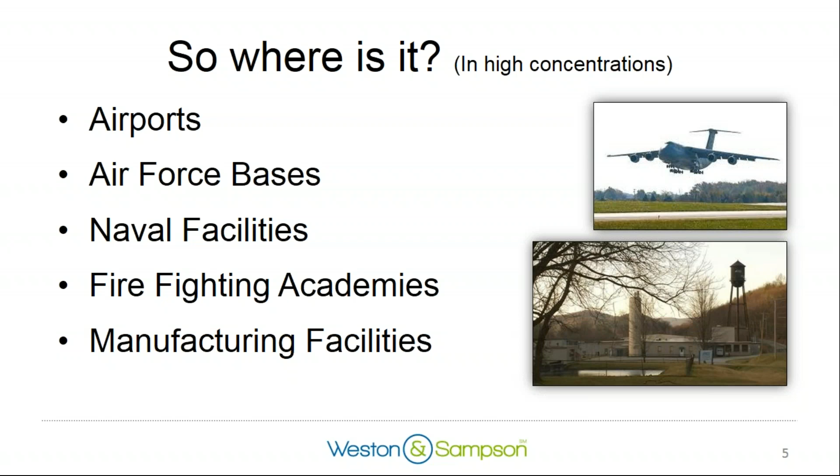But more recently, kind of since 2018, we started to see more and more locations with positive PFAS in the soil or in the water. And so recently, as analytical sampling methods have improved and we see detection levels going down and being more accurate, we see PFAS in a host of places, like car washes, agricultural land where biosolids are spread, and biosolids coming from wastewater plants, so there's often PFAS in wastewater.

Private septic systems can have PFAS. Anything that's excreted from a human body or washed off your Teflon pans and goes down the drain often ends up in a septic field. Landfills, and that's either from accepting sludge from wastewater plants or accepting those modern products that I was discussing. Waterproof fabric, old carpeting or furniture often has PFAS, which can seep out of the products and get into the landfill leachate. And then more and more, we're starting to look at PFAS in food.

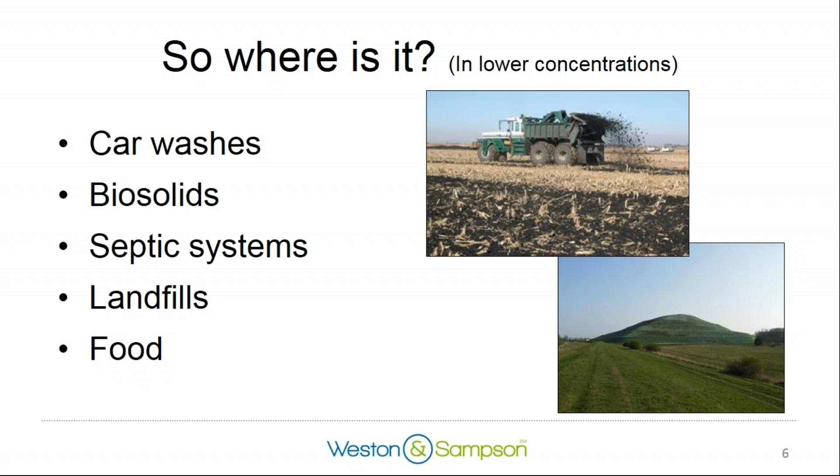So not necessarily just in plastic packaging of food, but also just in fruits and vegetables that you might grow in your own backyard garden. Anywhere that you are working sort of in the modern world, there's a good chance that there's PFAS in it. And whether that's plant uptake from vegetables or animal uptake from feed, we kind of are starting to see PFAS in a whole host of places.

So on the manufacturing side, you can have discharge to surface water sources or to wastewater plants. Once the wastewater plant gets it, it can either be discharged into your surface water supply, or it can be transported as sludge to a landfill or biosolids to agricultural land. Leachate from landfills can go back to the wastewater plant, and you kind of have a cycle right there where wastewater plants are sending activated sludge to the landfills that has PFAS in it, and then it gets into the leachate and comes back to the wastewater plant.

We see release again from firefighting foams, which can run off into surface water, or it can seep into the groundwater supply. And then we also see a lot of spreading of PFAS just through spreading of water. And so whether that's through drinking water to residential use, or irrigation water, possibly pulled from a local river or aquifer to irrigate farmland, that can also spread PFAS in that manner.

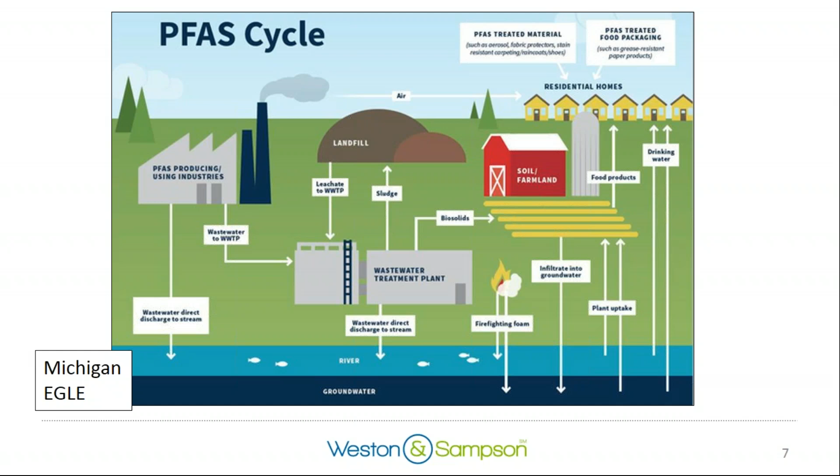And you do see in some states that there's high amounts of positive samples, such as Michigan, for example. And there's a good chance that Michigan does not have higher than average PFAS in their environment. There's a good chance that they are just being more proactive and sampling more locations, which results in more positive detections.

So before we go on to the treatment side, I just wanted to reiterate the structure of PFAS. And so that carbon-fluorine bond, which forms the backbone, has an adsorptive property to it. So it can bond well to organics. And so that adsorptive property is based on the chain length. So the more carbon-fluorine bonds in that backbone, the more adsorptive the PFAS compound will be. Conversely, the head group, which is the functional group on the end of the compound, is anionic, so it has a negative charge. So that negative charge can be useful when we talk about different filtration media such as ion exchange, as it gives us something to bind onto.

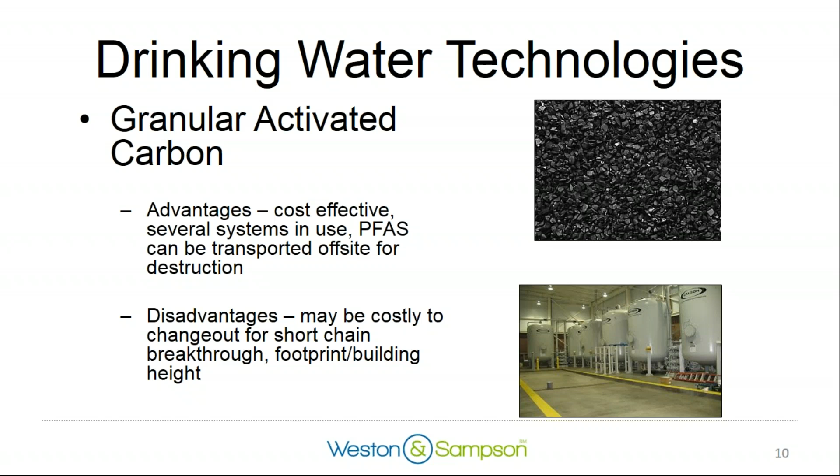When we look at a newer developing technology that's starting to really get a lot of focus in the market, it's ion exchange resins. So ion exchange resins are essentially plastic beads that have a coating or a surface that promotes not only adsorption of PFAS compounds, but also ion exchange properties. So you will adsorb the backbone structure of the PFAS compound, but you will also release chloride into your water in exchange for taking up the head group of the negatively charged PFAS.

So because we have this dual method of treatment, adsorption and ion exchange associated with resin, we're seeing more efficient run times and lower contact times required to see equivalent PFAS removal. So with this kind of custom designed treatment associated with ion exchange resins, we can see this longer life. The lower contact time results in smaller vessels, which can result in smaller building footprint, smaller land footprint, and oftentimes they're shorter vessels as well, which means you don't need to go quite as high if you're putting these vessels inside of a building.

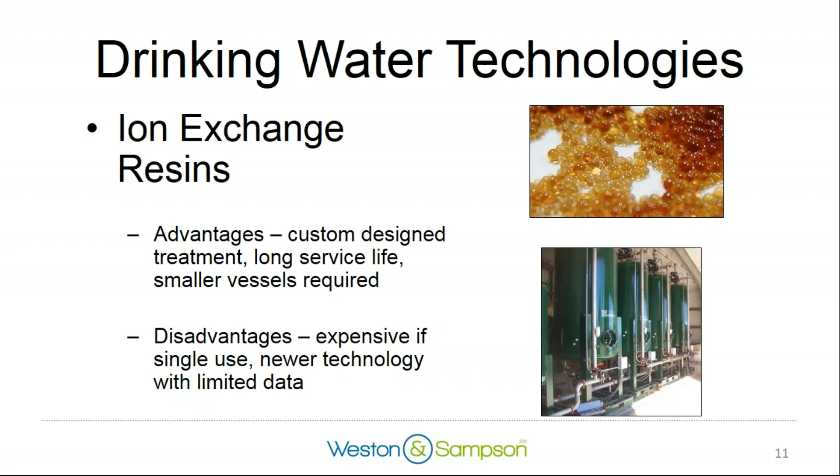Disadvantages, though, for ion exchange resin is that it can be quite expensive compared to GAC because there are limited volumes on the market and also limited manufacturers on the market at this point in time. Being a newer technology, there's less data available. It's really only been within the last 2 or so years where we started to see resin really pick up and be a viable option for PFAS treatment. And so because of that, we don't have the best handle on either run times or O&M costs associated with running the resin for PFAS. And so oftentimes longer run pilots are required to make sure that the engineer or the designer has a good grasp on how the resin will react for that specific water supply.

And so really the last viable option for treating drinking water or large volumes of PFAS contaminated water is either nanofiltration or RO membranes. And so whenever you have a contamination of a water supply, usually these low molecular weight membranes are always an option. You see very good removal efficiencies for both long chain and short chain compounds, oftentimes over 99%. But there is a host of disadvantages associated with membranes beyond just the high capital and O&M costs associated with operating a membrane facility. And primarily the main disadvantage is trying to figure out what to do with the waste stream. So the waste brine that is backwashed off the membrane still has high levels of PFAS in it, and the operator or the designer will have to figure out what to do with that PFAS.

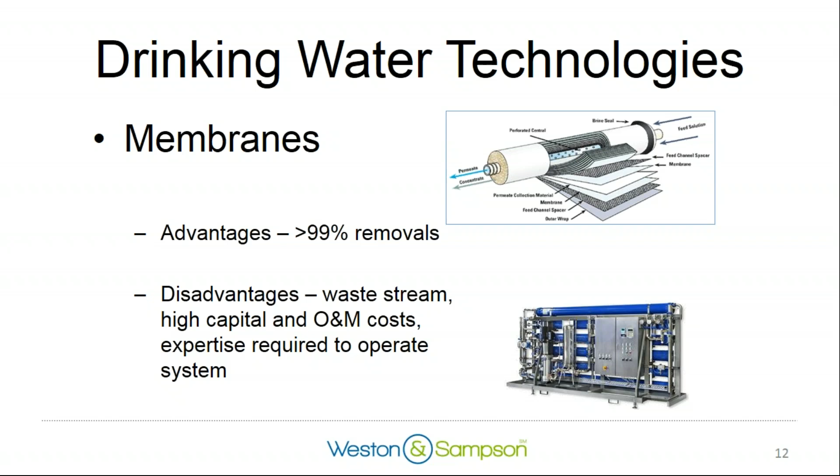Oftentimes with membrane filtration systems, there will be an extra GAC filter or resin filter that is just used to handle the waste stream. So when you have just a low volume of waste, oftentimes you can have just a single GAC vessel off to the side, and you can run empty bed contact times in the hours up into the days, and basically use it as a super loader to try to adsorb as much PFAS onto the media as possible. And then that spent GAC media will then be transported offsite for reactivation.

So when we think about other common treatment technologies for drinking water, there's a whole host of other options that are out there, but none that have been proven to be successful for removing PFAS from water. So that includes things like aeration; coagulation, flocculation, sedimentation does not remove PFAS. Conventional rapid filtration with either sand or anthracite does not remove PFAS. And conventional oxidation is not shown to have large success removing PFAS. And so that includes things like disinfection with chlorine or oxidation with UV or ozone. So none of these commonly used treatment technologies that you may have in place at your drinking water treatment plant are effective for removing PFAS.

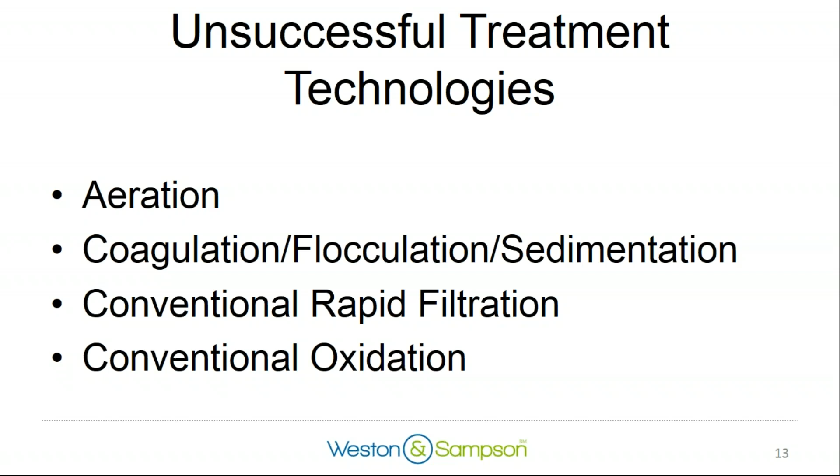So looking at some of the more emerging technologies for PFAS, things that are being developed in labs around the country and around the world, we really can kind of separate them into two categories. That first category is trying to figure out a way to destroy PFAS primarily on site, so that it doesn't require transport off-site to an incinerator or a reactivation facility. The two technologies that are showing promise are electrochemical oxidation and plasma treatment.

Both of these treatments use high voltages and high currents of electricity to basically form free radicals that can break that carbon-to-carbon bond. So these technologies have been proven to reduce the chain length of PFAS, essentially turning an 8-chain PFOS into a 6 or 4-chain PFBS. These short chain compounds have less dangerous health impacts from the current toxicology results. So there's some promise there that if we can reduce the amount of more toxic PFOS into less toxic PFBS, that might be successful.

There's also some promising results that show that at certain voltages and certain amounts of contact time within these reaction cells, you might be able to actually break apart that carbon-fluorine bond, which would essentially remove the resistant man-made bond that's been manufactured. The downside, though, with these two treatment technologies at this point in time is that they require several hours to see the oxidation of PFAS required to successfully say that the PFAS is limited to a safe level. Because it requires so much time in the reaction cell, it is not necessarily viable yet for treating large volumes of water or treating a constant water supply such as a drinking water well.

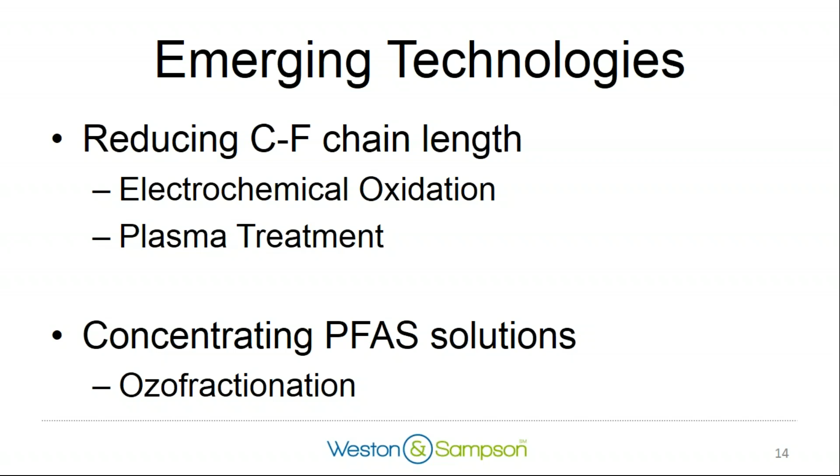Due to that surfactant property in the hydrophilic head group and the hydrophobic tail group, the bubbles that form on the air-water interface are primarily PFAS and to a limited extent water. So you can bubble in ozone or air, scrape off the bubbles that form on the surface of your water, and that is a more concentrated solution than what was going into the influent supply of the ozofractionation column. You can run multiple columns in series and keep concentrating the PFAS in your water, essentially turning it back into an AFFF or a concentrated PFAS solution that could then be either destroyed with one of the above mentioned technologies or clung to activated carbon and then shipped off-site for destruction.

So that leads us into the first of our two case studies, which is around the former Pease Air Force Base. Pease is located in Portsmouth, New Hampshire, on the seacoast. The base was formed in the early 50s, and it shut down as part of the base realignment program in the early 90s. Since then the land was transferred over to the Pease Development Authority, who still uses the runway that was part of the Air Force Base. It's now split between commercial flights and the New Hampshire Air National Guard. The land from the base is now used primarily as office space, but there's also manufacturing, college buildings, a golf course, restaurants, daycare centers. So a whole host of different activities are going on with the former base land.

In the late 70s, early 80s, it was discovered that there were VOCs in the groundwater at the base. One of the larger wells that supply drinking water to the base, called the Haven Well, which is centrally located in the base near the taxiway, had VOCs around it, but not in the well itself. So in the mid-80s, a water treatment plant was built in the event that the VOC plume migrated towards that well. In the early 90s, as part of the base realignment program, the EPA designated Pease as a Superfund site, and cleanup started in that time frame to try to remove all the VOC plumes.

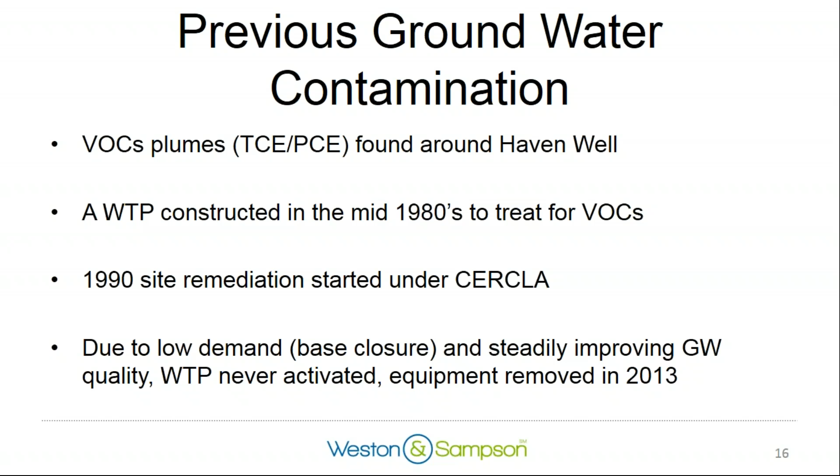Due to the closure of the base and the increase in groundwater quality as a part of the Superfund cleanup activities, the water treatment plant, which had aeration and GAC filters in it, was never activated. It was never triggered. The VOCs never migrated to the Haven Well. So in 2013, that old equipment was demolished from the water treatment plant, and the water was never contaminated with the VOCs, so it just got to go out to the distribution system.

A few months later, though, the Air Force tested the wells around the base for PFAS, and it was discovered that there was high levels of PFAS in the Haven Well. So just a few months after they tore out the old GAC filters, it was discovered that there was PFAS in it, and immediately the well was shut down.

So once it was discovered, though, that there was PFAS in the Haven Well, it made a lot of local news. The Haven Well was used as a drinking water supply for the Pease area after the base was shut down. And so there was a lot of concern about the health impacts of what the exposure to PFAS, the high levels of PFAS, would have done to those that were drinking the water at the time.

And so early on, technical response teams were formed to try to evaluate the situation that was at hand and to try to understand where we were at in terms of science of treatment, health impacts, and what exactly PFAS exposure does. So the technical response teams included the City of Portsmouth staff who operate the drinking water system at Pease, the Pease Development Authority who owns the drinking water system, EPA, New Hampshire Department of Environmental Services, the Air Force, who had taken responsibility for the contamination from the PFAS, New Hampshire Health and Human Services, and the ATSDR to provide feedback from a toxicology standpoint.

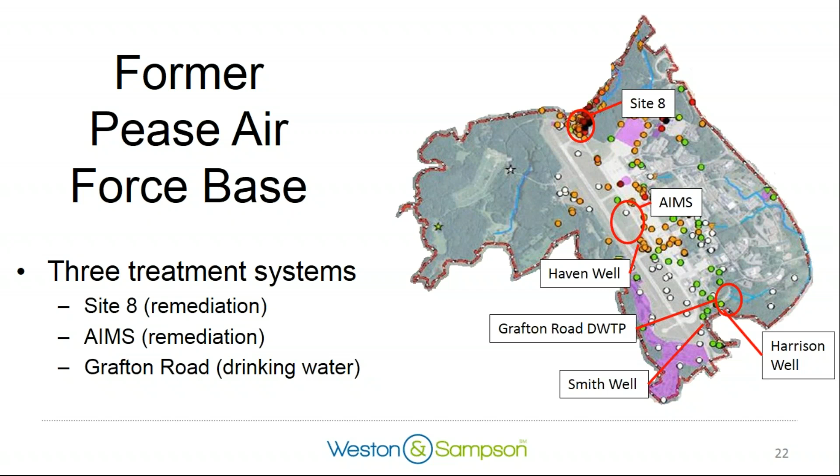And so both of these remediation systems are pump and treat systems relying on GAC and ion exchange resin for treatment. And then finally, the third treatment system is the Grafton Road Drinking Water Treatment Plant, which is that old water treatment plant that was never activated in the 80s. And it will treat water from the 3 public supply wells, the Haven Well, which is again centrally located between the runway and the airfield, and the Harrison and Smith wells, which are on the southern end of the former base.

So when we look at the flow rates and the concentrations from the 3 public supply wells, initially the Haven Well, the high producing well in the center of the runway, came back at around 2,500 parts per trillion for PFAS. Subsequent sampling has shown that the concentration has declined slightly, and so we're now around 1,500 parts per trillion of PFOS and PFOA. The Harrison and Smith wells, which are further away from the runway and separated from any major crash sites or AFFF release sites, have significantly lower concentrations of PFOS and PFOA, between really 10 and around 30 or 40 parts per trillion.

So looking at the existing building structure, this was the old treatment plant that was built in the mid-80s. There's some old pads in there where the GAC filters used to sit, but largely it's been gutted. The water from the 3 wells comes to this central location. Chemicals are added, the water is disinfected, and then it goes out to the distribution system.

So one of the requirements from the Air Force with this project was that this building be reused as part of the new project. So initially, the water from the Harrison and Smith wells was diluted from water pumped from the Portsmouth water system, which is on a different pressure grade.

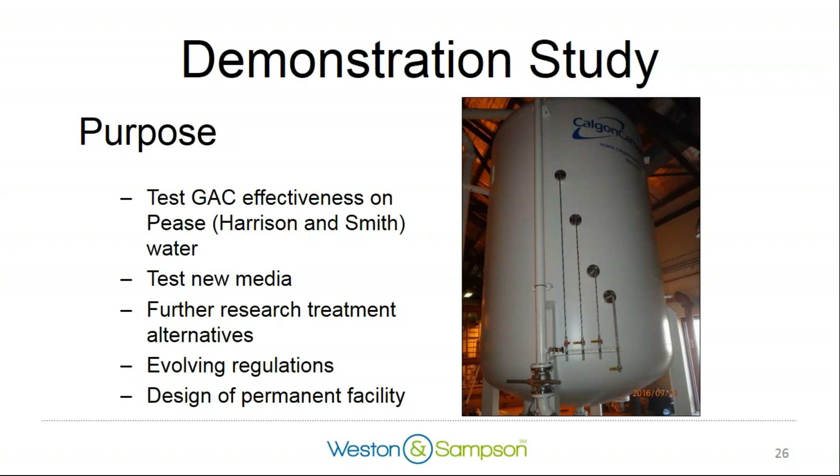And having those temporary filters in place also gave us time to work on the permanent design that would work for treating the Haven well and allowing us to bring the Haven well back online. So here's kind of a quick schematic. We have the water from the two wells, the Harrison and Smith wells, come together and go through the two GAC filters, which are operated in lead-lag.

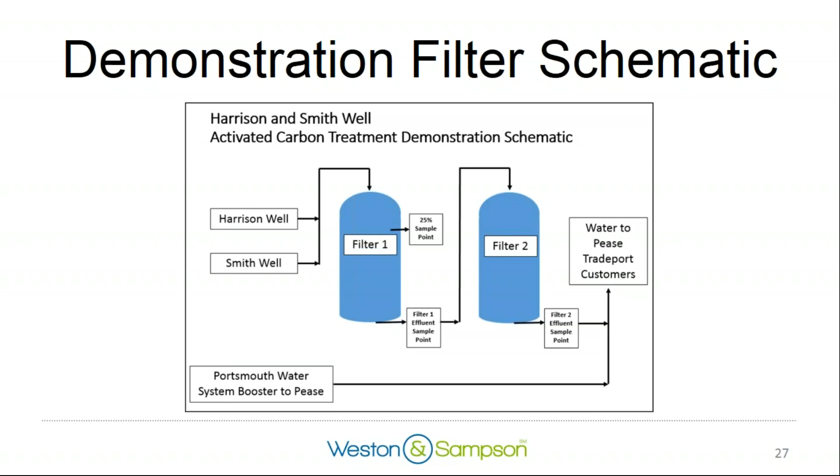Because the Haven well accounted for almost 50% of the capacity of the water supply for Pease, we needed to continuously pull supplemental water from the Portsmouth water system, and that was added downstream of the lag filter.

Here's a few quick photos of the installation of the GAC filters in the existing treatment plant. There was no knockout wall to install the filters, so we ended up opening up a section of the roof and dropping them in by a crane. And as you can see on the photo on the right-hand side, these filters, which are 10-foot diameter, are roughly 21 feet tall. And so they are quite large, and they have quite a large footprint in this building.

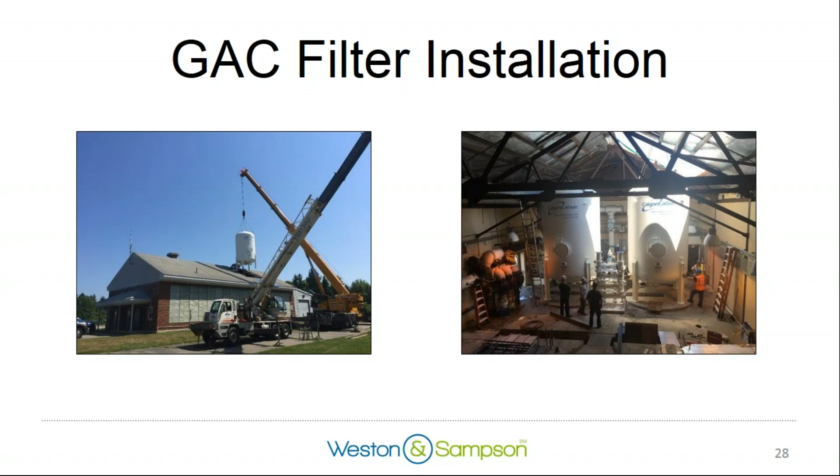So those filters were installed in September of 2016. And since then, it's been almost 3 years. We've treated a little over 400 million gallons of water. And in that time, we've changed out what's equivalent to 3 filter vessels or 60,000 pounds of GAC.

In March of 2018, so after around 17 or 18 months of operation, we changed out the media in the second vessel, the lag vessel. And that may be counterintuitive because you would see higher levels of PFAS in your lead vessel. But we did that so that we could prevent short chain compounds from making it through the lag vessel and into the distribution system, and it allowed us to have more time to try to evaluate the breakthrough curves of some of these long chain compounds in the lead vessel.

We also changed out the carbon in both vessels in November of 2018, and that timing was based primarily off of a decision to not change out media in the winter, because this is all still a temporary setup, and we use frac tanks and hoses outside and groundwater discharge to get rid of backwash wastewater, so we didn't want to do that in the winter in New Hampshire. And so we really wanted to do it when it was still warm enough out. We also didn't want to do it too late in the event that we'd have to change it out in the winter.

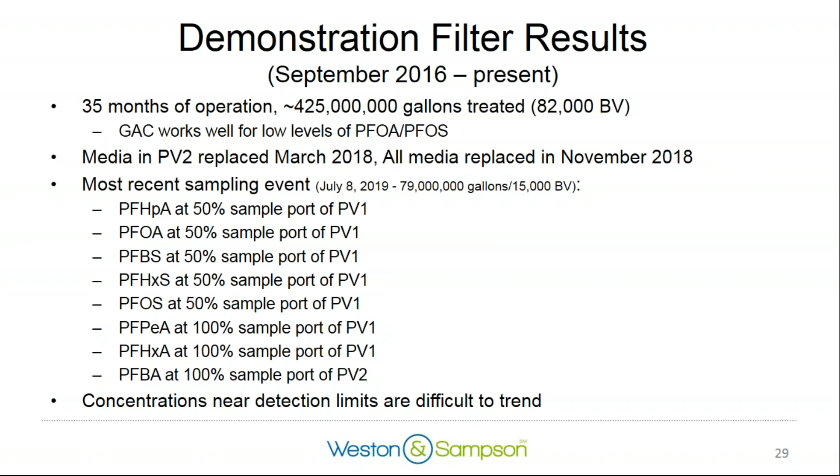So since November, here are some of the results that we've seen for the different compounds moving through the lead and the lag vessels. What we see is that the long chain compounds move through much slower than the short chain compounds. And recently we've switched from a 20 part per trillion reporting limit to a 2 part per trillion reporting limit. So we think we're starting to see things not necessarily move through faster, but we're starting to get more accurate results of how quickly things are moving through the filters.

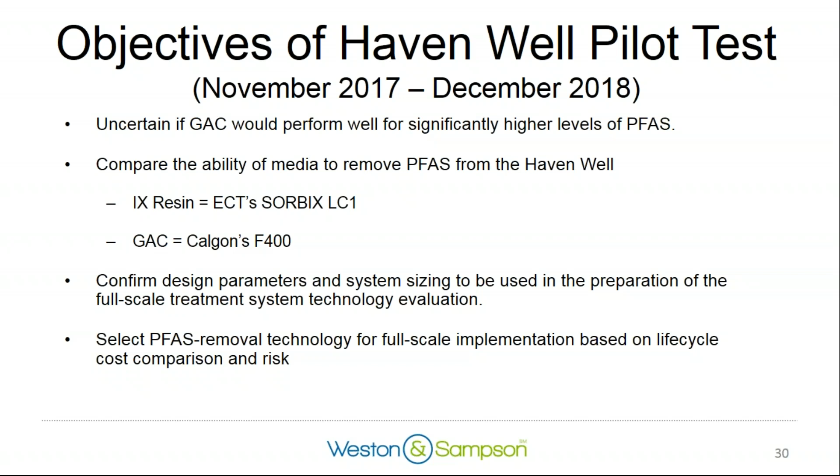So given that the concentrations are significantly different in the Haven well compared to the Harrison and Smith wells, we decided we need to do additional piloting at the Haven well to see how the GAC would perform. So we partnered with ECT2 to do a side-by-side pilot comparison of ion exchange resin against the Calgon F400 granular activated carbon that we've been using in the demonstration filters.

And here are a couple quick photos showing the setup. Each media is placed in 4 columns, and each column corresponds with 2.5 minutes of contact time. So this allows us to sample essentially at the various bed depths through a large filter.

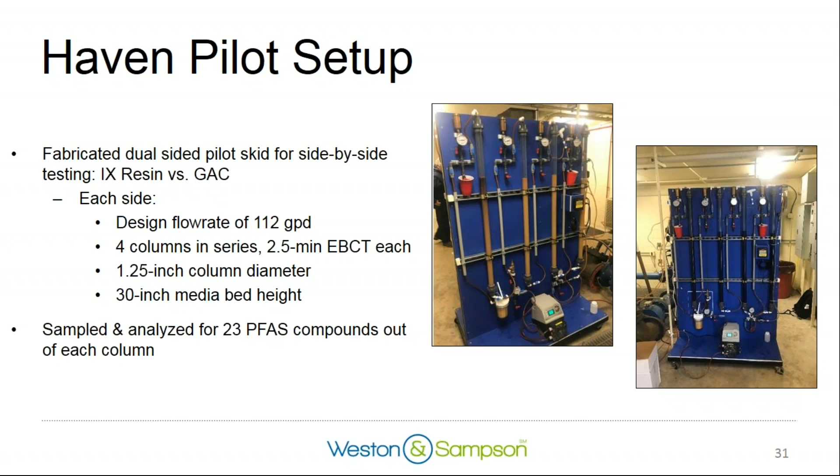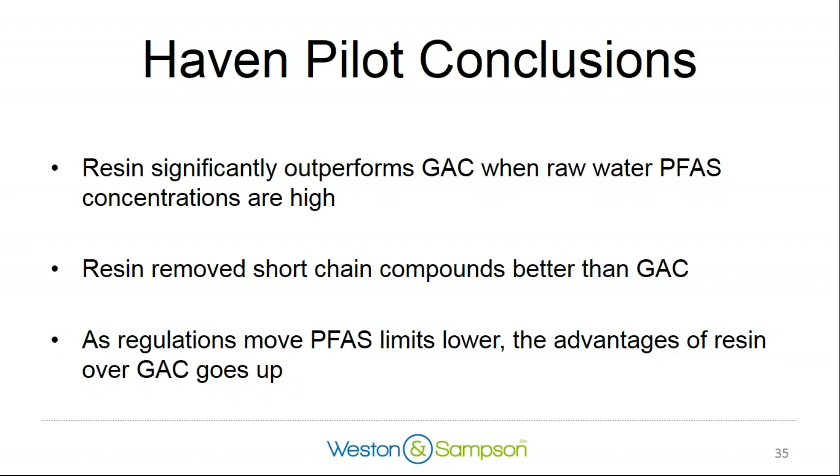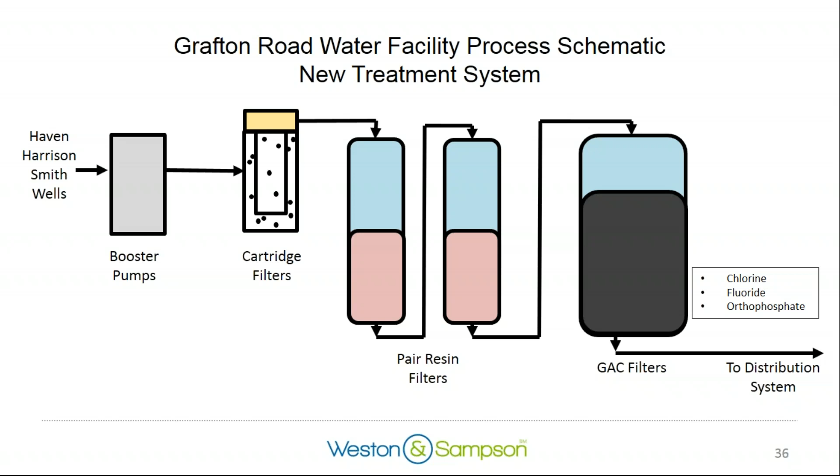So when we look at the final design for the Grafton Road plant, we are looking at essentially this real crude schematic. PFAS will be removed through a lead lag pair of resin filters. And then due to the concerns of the legacy compounds in the aquifer, we decided we needed to have a GAC filter as a polishing step on the effluent side of the resin filters. And because we're stacking all of these filters in line, we have to pay attention to our head loss, so we have a set of booster pumps that will increase the pressure from the wells.

During the design, we did a quick life cycle cost analysis to compare the cost associated with using GAC only versus relying on resin or various different options. And so while we saw that the equipment cost was highest for installing the resin filters with the GAC polish, it had the lowest 20-year life cycle cost.

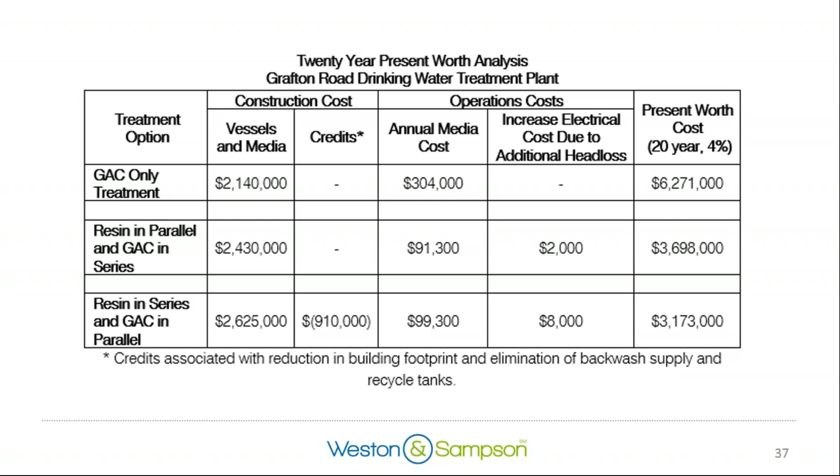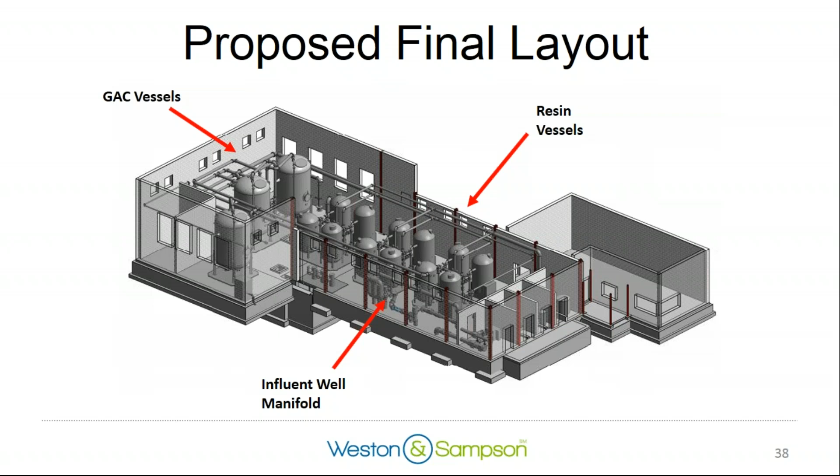And here's a rendering. Again, the central portion of the building is the existing structure, with the new additions shown off on the sides.

So that gets us to our second case study, which is the work that we are working on right now at the former Fort Devens, located in Devens, Massachusetts. It's a former Army base that shut down in the mid-90s, and the majority is overseen currently by Massachusetts Development, which is a state-run agency tasked with developing the economy in this area. And so much like Pease, it's a space with a lot of offices and warehouses. There's, again, a college and a golf course and restaurants in this area.

So again, we are seeing water system demands that are not overly consistent. We see high demand during working hours, during normal 9 to 5 times, and much lower demands on the weekends and in the evenings. So similar to Pease, Devens has 3 wells. These are larger wells from a flow standpoint than at Pease.

The MacPherson Well on the north side of the former base operates at 650 gallons a minute, and its concentration is the highest at around 120 parts per trillion. And then on the southern end of Devens is the Patton Well and the Shaboken Well. Both of those are rated for 1,200 gallons a minute, and both have around 30 parts per trillion for PFAS. In Massachusetts, though, we are looking at 6 compounds added together. That's PFOS and PFOA, plus PFHxS, PFHpA, PFNA, and PFDA. So all of these compounds are added together when we look at the concentrations in these wells.

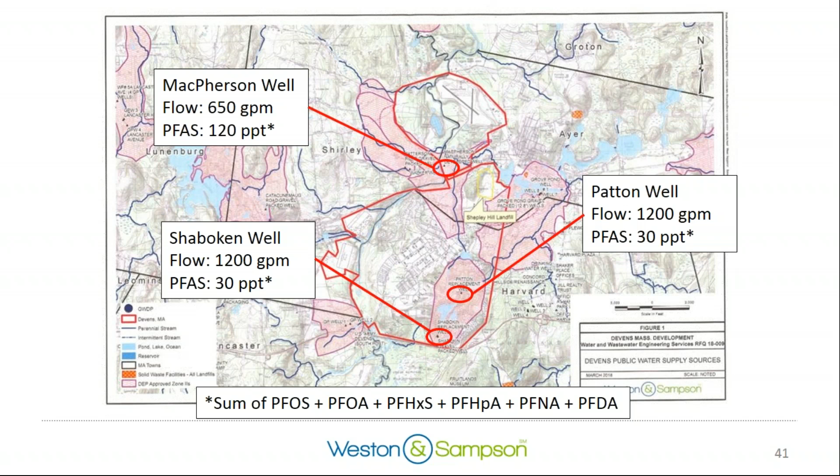Massachusetts has been moving quite fast recently from a regulatory standpoint. Again, in May 2016, the EPA dropped their health advisory for PFOS and PFOA to 70 parts per trillion for the 2 compounds added together. In June of last year, the Massachusetts Office of Research and Standards released an ORSG for essentially 5 compounds added together that needed to be less than 70 parts per trillion.

So at that time, Devens had turned off the MacPherson Well, which, to remind you, had around 120 parts per trillion in it, and were relying on the Patton and Shaboken Wells, which had around 30 parts in them. Due to the size of the wells and the current system demands, they could rely on just the 2 wells, and they could essentially mothball the MacPherson Well if that was what they had chosen to do.

However, in April of this year, Massachusetts revised their standard and released what's called a GW1, or groundwater 1, standard, and that level is 20 parts per trillion for 6 compounds added together. So it's the previous 5 plus PFDA. When this new level was released, it significantly impacted Devens in that they had no wells in compliance with this 20 part per trillion level. And so that moved them from thinking about what to do with the MacPherson Well to now having to figure out what to do with all of their wells. At this time, they were handing out bottled water to whoever wanted it, and they had an advisory posted around the Devens area and on their website.

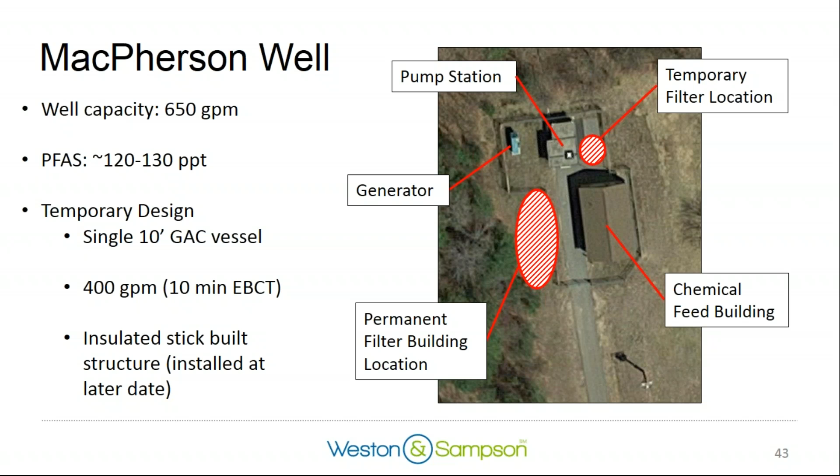So here's a picture showing the filter and how it was installed in that tight space. The filter was placed by a crane that brought it over the chem feed building. The raw water main that's in the ground, between the pump station and the chem feed building, was teed off. The water was routed to the influent side of the GAC filter, and then the effluent was routed back into that line. So the plan is to install an insulated stick-built structure around this filter in the coming months, and install a temporary heater so that we can use this filter in the coming winter.

So really from the time where we had our first sit-down meeting with the state environmental agencies to the time where we started up the filter was around 4 months. So a pretty fast response time to get a full-size filter in place to treat the water.

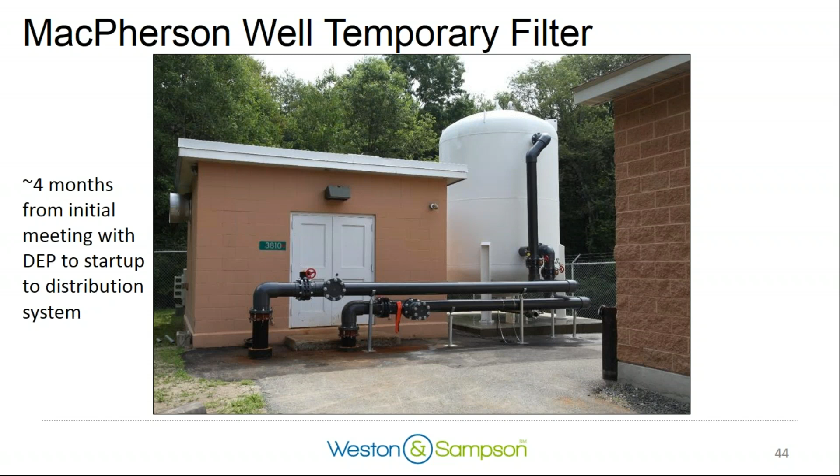So with this filter online, attention was shifted to the Shaboken well. The well is rated for 1,200 gallons a minute, and again has PFAS around 30 to 40 parts per trillion. So the advantage at the Shaboken well is that we do not have land constraints. We have a nice large open field next to the Shaboken well where we could drop in 2 pairs, so 4 total vessels that are 12-foot in diameter and hold 20,000 pounds of GAC each. So going off our 10-minute empty bed contact time, we can operate these filters at around 900 gallons a minute in a lead-lag configuration.

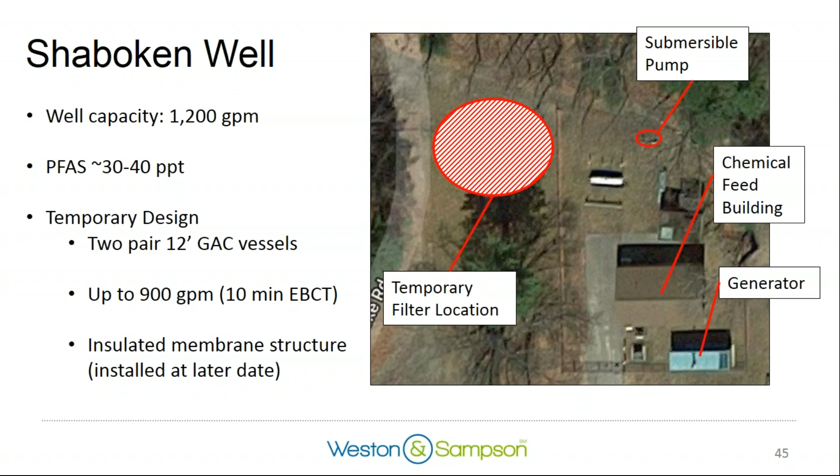And between the flow from these filters and the flow at the MacPherson well, we could at least satisfy system demand and try to lift the drinking water advisory. So here's a photo of where these filters currently stand. We did a little bit of leveling of the ground in that area, brought in some crushed stone, installed a pair of concrete pads for the filters, and then have been working on bolting up the filters. Currently we're still working on conditioning the media, but we expect it to be stabilized in terms of pH in the next week or two, and then these filters will be sent to the distribution system as well.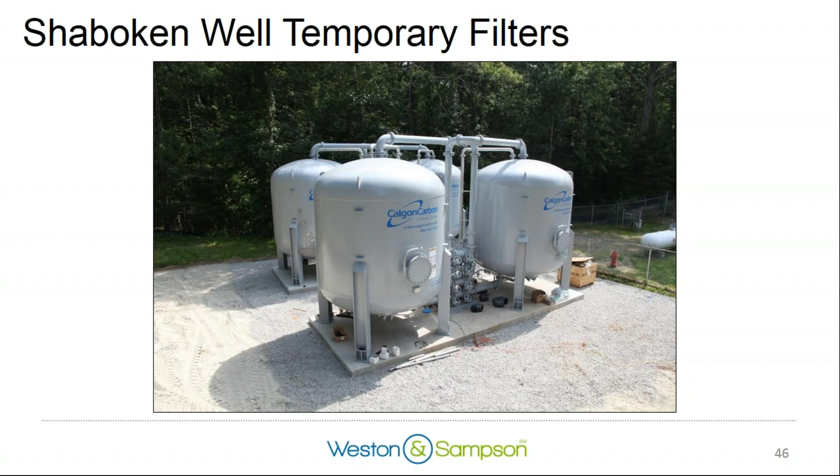Looking at Devens' third well, the Patton well, it's the same size and same concentration of PFAS as the Shaboken well, but we have the same issue that it is very much land restricted, similar to the McPherson well. So given that the other 2 wells, the McPherson and Shaboken well, are large enough to satisfy system demand, we thought we could try out ion exchange resins at this site. That is also advantageous in that they don't take up as much footprint as the larger GAC filters.

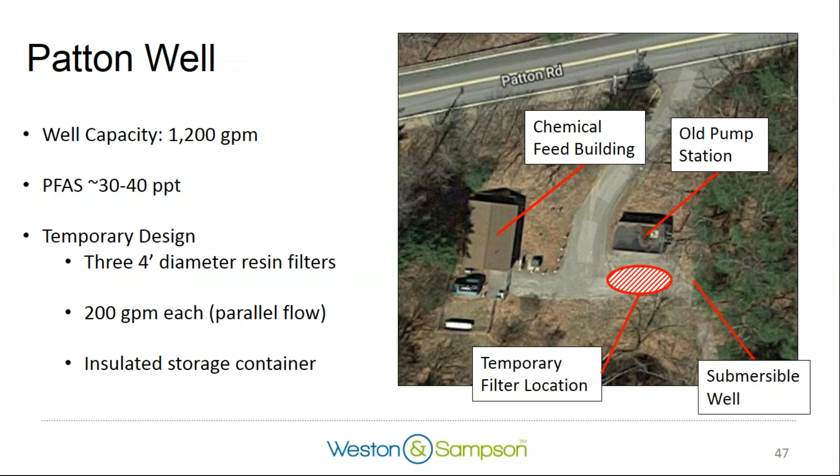So our current design is to use 3 4-foot diameter resin filters in parallel. Each resin filter is rated for 200 gallons a minute. So this setup will allow us to test 3 different resin filters and essentially have a full-size pilot setup where we can test different media to try to optimize for a more permanent system. These filters, being small enough, can be installed in an insulated storage container or a shipping unit. That'll be dropped on site, the filters will be bolted up, and we should have this system online by around December of this year.

So as Steve referenced last week, a few useful websites. Should you have any questions on PFAS, the ITRC website is fantastic. They update it multiple times per year, and they stay on top of state regulations and treatment technologies and analytical processes that are rapidly evolving in the PFAS world. The EPA, of course, is a useful reference for PFAS. And Northeastern University is working on compiling a lot of useful PFAS information from around the country.

So I think at this time, if anyone has any questions, I'd be happy to answer them. Great. Yes, we've been getting tons of questions, so we should jump right into those.